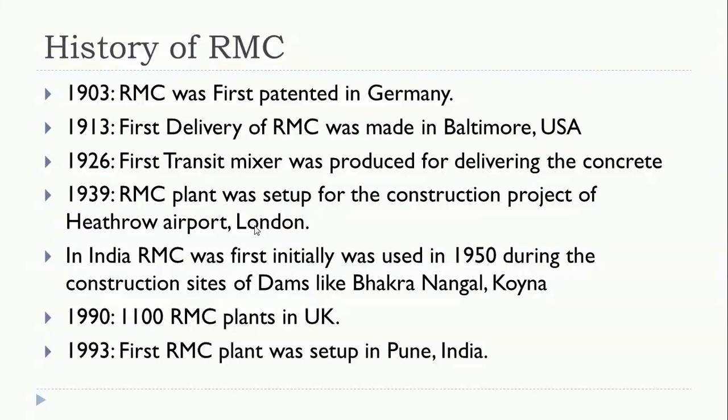In India, RMC was initially started in 1950 during the construction of Bhakra Nangal Dam and Koyna. In 1990, there were around 1100 RMC plants in the United Kingdom, whereas in India the first RMC plant was set up in Pune in 1993. So if you see how the history has developed, in India the first RMC plant was developed in 1993, whereas in other countries it was started way before our independence. Okay.

So, introduction. Ready mix concrete is a specialized material in which the cement, aggregates and other ingredients are weigh batched at a plant in a central mixer or a truck mixer before delivery to the construction site in a condition ready for placing by the builder. As the words say, it is a ready-made concrete. It is prepared in the plant where all the concrete ingredients are weigh batched, in a suitable environment.

It is homogeneously mixed in the plant, and then it is transported to the construction site so that it can be readily used by the construction people. Okay, so no need to mix it once again. Before delivering the concrete to the site, the concrete will be mixed in the plant itself, or it will be mixed in the mixer. There are many types we'll study in the coming slides. So before delivering to the construction site, it will be in a ready-made condition, so it can be used to place the concrete by the builder.

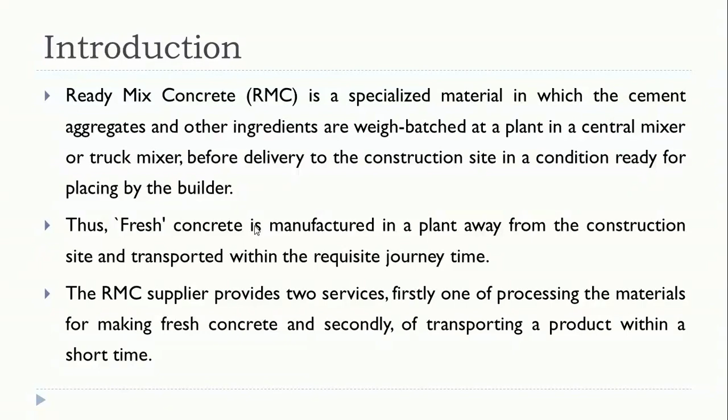So the ready mix concrete plant is used to manufacture ready mixed concrete, which is used in all the construction projects. As already told, the ready mix concrete plant is used for all the types of construction works, whether it is 2 to 3 story buildings or multi-story buildings, or mass constructions like bridges and dams. So in almost all the types of construction projects where concrete is used, this kind of ready mix concrete is used.

So why? Because it gives strong concrete, and the quality of the concrete will be good because it is proportioned properly for the different batches of concrete. All the concrete mix has been proportioned uniformly, so that it gives a good quality concrete even if there are more than 10 batches of concrete. If you are preparing all 10 batches, the concrete will be uniformly or thoroughly mixed. Okay, so the quality of the concrete will be good.

So manufacturing ready mix concrete and delivering it through a transit mixer enables the implementation of precise concrete. Okay, so if you manufacture the concrete in a suitable environment, like an RMC plant, and then deliver it by means of a transit mixer, we are able to enable the implementation of precise concrete in the construction project.

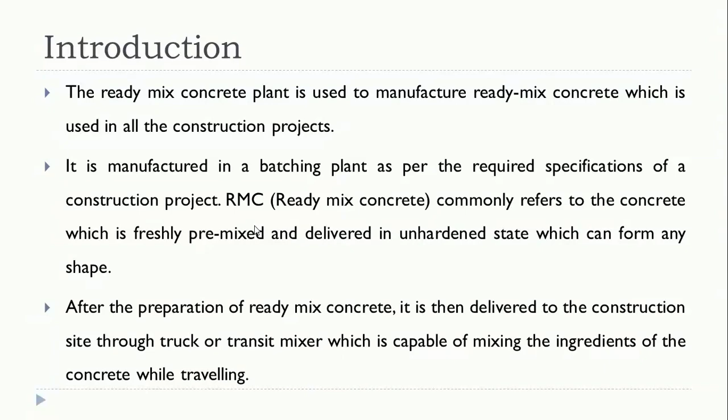Need for ready mix concrete. Requirements for high grades of concrete. If you want higher grades of concrete, then we can go for ready mix concrete, because higher grades of concrete cannot be prepared manually, or by means of hand mixing. So if you require high grades of concrete, then you can go for RMC, that is ready mix concrete.

Then correct accountability of the ingredients. Here in the RMC plant they are going to use weigh batching, which you have studied already. It is accurate batching, and it produces a uniform quality of concrete for different batches. So if you want correct accountability of the ingredients, then we can go for an RMC plant.

And rapid development of the infrastructure industry. If you would have seen, so many RMC concrete plants have been developed. And the infrastructure development of a country is going at quite a rapid rate. If we say infrastructure, we mean the construction of buildings and roads, and it has to be proper. So for the rapid development of the infrastructure industry, ready mix concrete is very much needed.

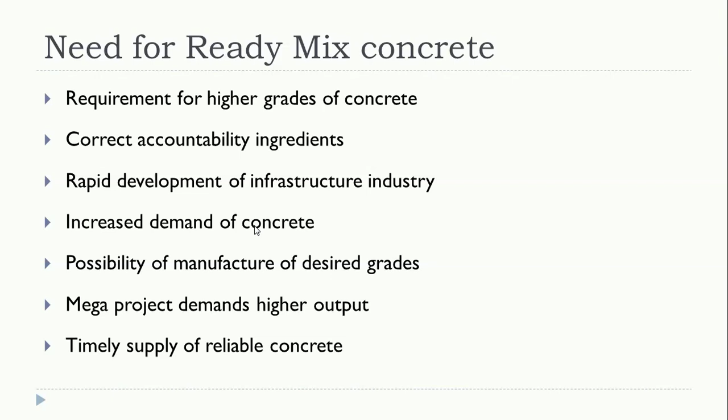Timely supply of reliable concrete. Another main role of RMC is to transport the concrete to the construction site within a short period of time. So if the construction work has to be done very fast, then the RMC plant transports the concrete at a good rate. They will transport the concrete in a quicker way. So in that way we are able to obtain reliable concrete from the RMC plant.

Scope of ready mix concrete. So where can we go for ready mix concrete? Major concreting projects like dams, roads, bridges, tunnels, canals, etc. Wherever concreting projects are there, we can go for a ready mix concrete plant, because as I already told, it supplies good quality concrete. For all the batches of concrete it supplies good quality. So that's why for all types of construction projects where concreting is required, we can go for RMC.

And for concreting in congested areas where storage of materials is not possible. Sometimes in a construction project, the place has a little congestion for storing materials like cement, sand and aggregates, and you require some space to store these materials. If you don't have space in the construction project, then it is quite difficult to store these materials in the available place.

If there is a scarcity of place to store, then we can go for an RMC plant, because if there is no space even to store the material, then for concreting also definitely there will be no space. For concreting you require larger space. So if there is scarcity for storing at the construction site, then concreting is also not possible. In that case we can go for RMC.

Sites where the intensity of the traffic makes problems. So at sites where there is traffic intensity, we can go for ready mix concrete, and where the intensity of the traffic is not much, we can also go for ready mix concrete, because it can transport in a faster way.

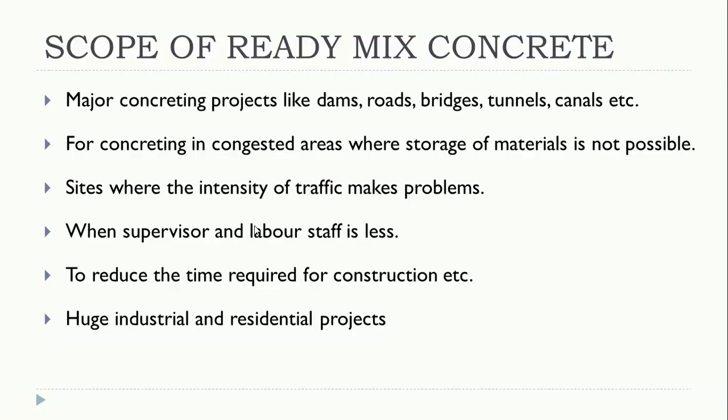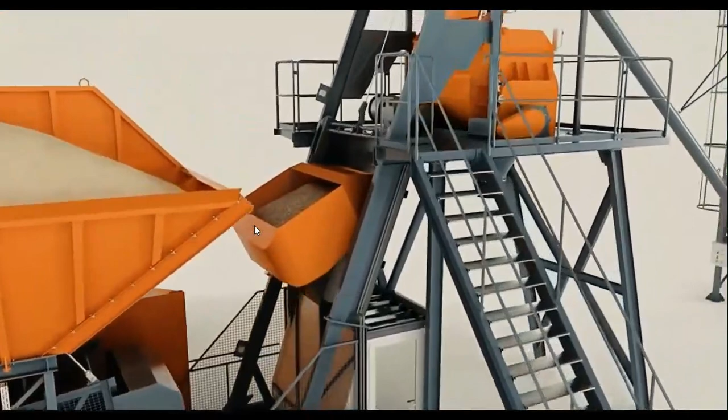Ready mix concrete. Ready mix concrete, that is RMC, is a type of concrete which is manufactured in factories, which is called as batching plant, based on the engineered mix design. The mixed concrete is brought to the construction site by truck mixers or transit mixers.

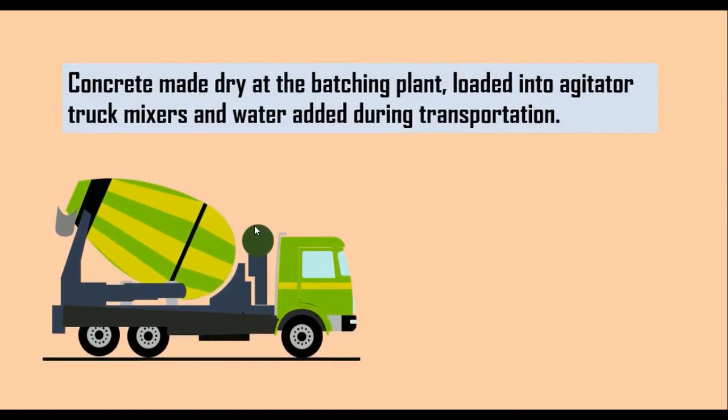The transit mixer is of two types. One type is the concrete made dry at the batching plant, loaded into agitator truck mixers and water added during transportation. In the other type, mixed wet concrete is made at the batching plant, discharged into the agitator truck mixers and transported to the site.

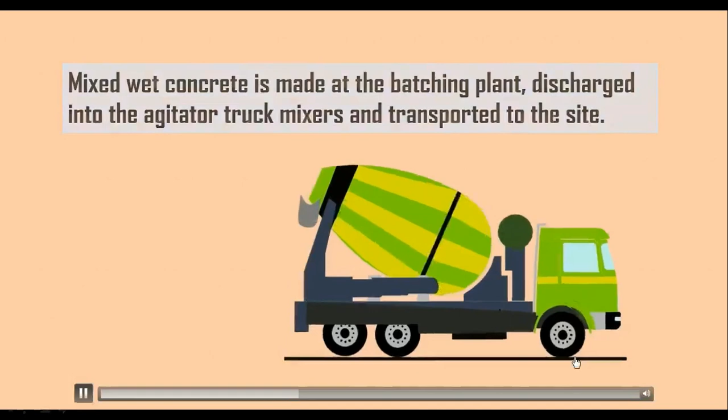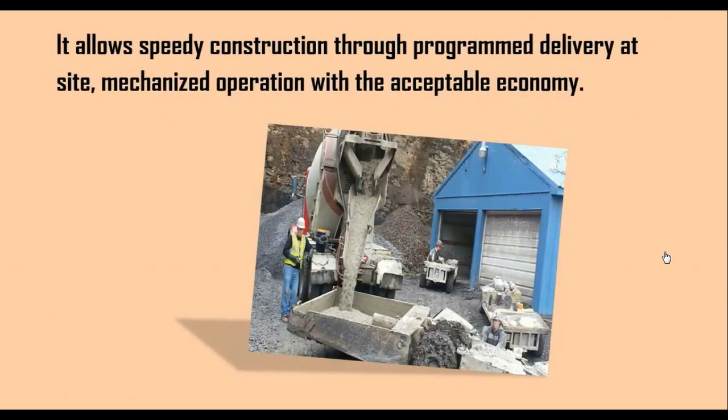The drum is made to rotate till the concrete is placed in order to keep concrete in a plastic state. We will see about the manufacturing process involved in ready-mix concrete later. It allows speedy construction through programmed delivery at site, mechanized operation with acceptable economy. Usage of RMC reduces the labor cost and site supervising cost.

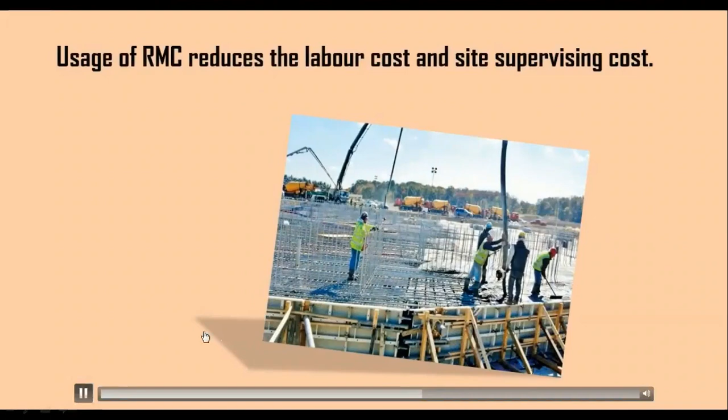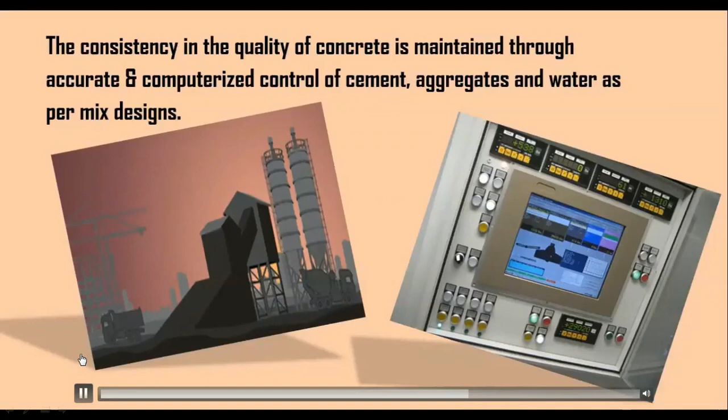The consistency in the quality of concrete is maintained through accurate and computerized control of cement, aggregates, and water as per mix designs. Usage of RMC also reduces the wastage of raw materials during storage. The main disadvantages of RMC are it requires special formwork arrangements, since the movement of concrete through pumps can cause vibrations.

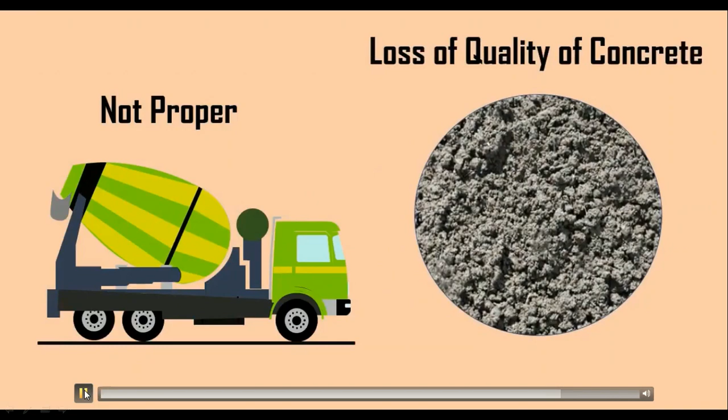And if the transit mixer is not in proper condition, there is a chance of loss of quality of concrete. In recent times, for large construction works, a small batching plant is set near the construction site where transit mixers may not be required.

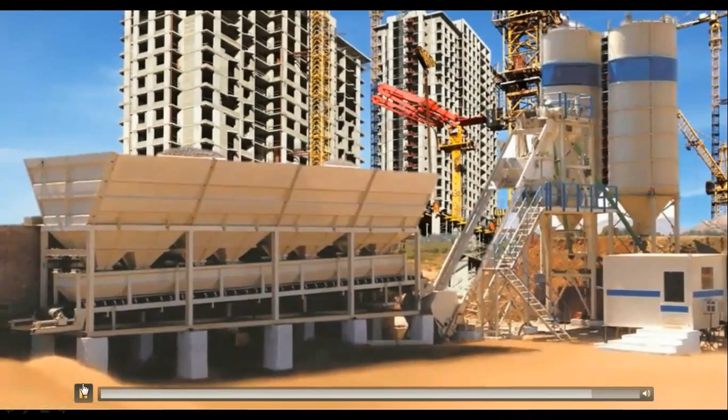So I hope you understood whatever is explained in the video. So we'll study what are the advantages of RMC. First one, better quality of concrete is produced. As I keep on telling from the first slide, you will get a good quality of concrete at every batch, because we properly proportion the materials, because all these materials are proportioned in a computer.

So all the proportions or mix designs will be set in the computer. All these proportions of materials are computerized. So at every batch of concrete, you will get a good uniform quality. Next, elimination of storage space for basic materials at the site.

If we want to take concrete all from the RMC plant, then you don't require any space to store materials like cement, fine or coarse aggregate at the site, so these storing spaces will be eliminated at the site. If you think that we will take concrete all from the RMC, then you don't require any space to store the concrete ingredients.

Next, elimination of hiring plant and machinery. If you go for RMC, then you don't require all the machinery for mixing. All the machinery which is required for mixing will be eliminated at the site, because the concrete will be obtained from the RMC. It will be in a ready to use condition, so you don't require any mixing machine at the construction site. You can directly use the concrete from the RMC plant.

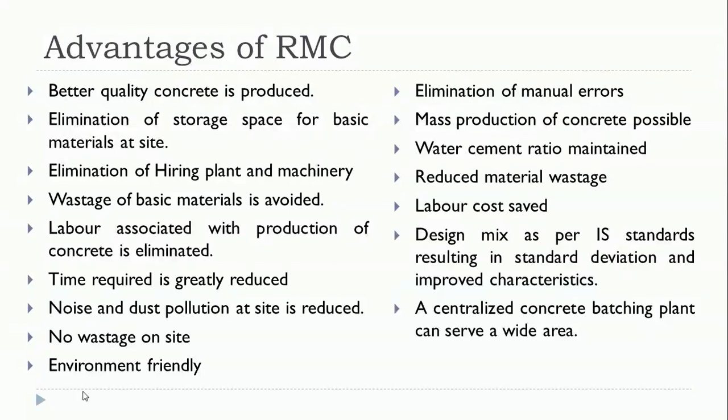Then disadvantages: it needs huge initial investment to prepare an RMC plant. Okay, it requires huge initial investment, so that is one of the disadvantages. But nowadays in Mangalore, if you go to Baikampadi, there are so many RMC plants. So yes, it requires initial investment. It is one of the disadvantages, but still there are so many RMC plants in the Baikampadi area in

Mangalore. Okay, so even if the initial investment is high, RMC plants are quite common in almost every city, especially if you go to Bangalore, there will be so many RMC concrete plants. So yes, that is one of the disadvantages.

And it is not affordable for small projects. So if a small quantity of concrete is required, say for a ground floor building or ground plus one floor building, then going for RMC is not economical. Okay, for small quantities of concrete we can go for hand mixing or machine mixing, like a tilting mixer or non-tilting mixer. We can go for that instead of RMC.

And it needs an effective transportation system from the RMC plant to the site. So we require a proper transportation facility to transport the concrete from the RMC plant to the construction site. Now we have a transit mixer. So in all the RMC plants, they are using transit mixers.